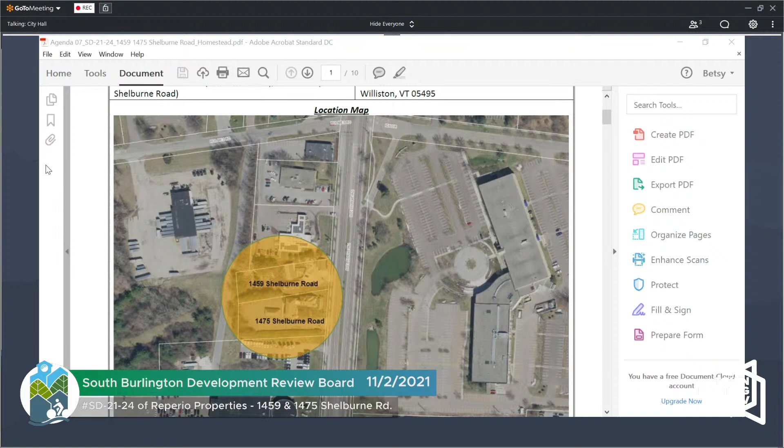Marla, I don't know if you want to scroll to a more detailed plan. I think that's a nice overview. Thank you. Any questions from the board before we start to move through the staff report?

Okay. The first comment is on page, there's no page numbers. I think it's page 3.

Thank you, Dan. Staff recommends the board provide feedback on whether they consider the proposed architecture to have created an attractive transition to the existing building.

I'd ask board members what they think, and I'm especially interested in Mark's thoughts, being that he's an architect. So, they have some renderings in front of us, and I'm wondering what the thoughts are.

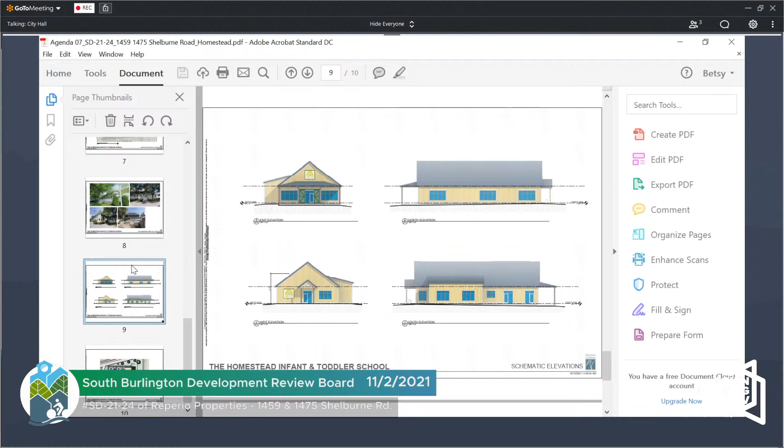Well, I don't think it's an unattractive building. I think it's actually an attractive building. I'm just questioning, I read the narrative, and it's supposed to be like a carriage house accessory to the main building, which is more like a Victorian style. I'm just questioning whether it's the appropriate style of house for Shelburne Road.

Right next to the Blissby building, Palace 9 development right on the corner. If this was out in the southeast quadrant, I would say it's a great building to go in that type of location, more rural. Shelburne Road to me feels more commercial, and it's like you're saying, it's an accessory structure to a building, but I think it needs more of a quasi-commercial feel, more complementary to the building currently there than an accessory building.

Right. And at this point, we haven't really looked a lot at materials, and I think we could definitely express a more contemporary aesthetic when we get into the materials a little further along. Originally, the concept was kind of more of a barn carriage house structure. I totally get it, and I see that, and that's successful.

I just think that for a campus feel on Shelburne Road, they need to be a little more complementary to each other than a contrasting accessory type feel. Yep, and I appreciate that too, because we don't want to just complement that building. We do want to complement the other context around.

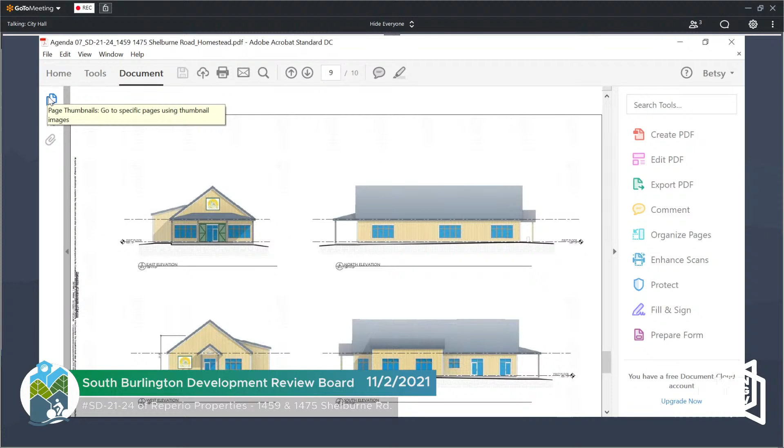Yeah, go ahead, Dan. Quick question: do our LDRs require consistency with abutting properties? Is there a required design aesthetic within this district, or no?

There is, this is a standard site plan review standard, are transitions between structure and site. The urban design overlay has sort of a form-based code light feel to it, where there's certain glazing requirements. The entrance has to face the street, and there has to be a walkway towards the street. So there's some varying degrees of specificity here.

I'm talking about more the relationship, does it need to be consistent with Shelburne Road specifically, as opposed to having the right to create a building that has some identity with the existing building, trying to create a campus feel. To some extent, looking at this as a childcare facility, I look at it and I kind of like something a little more attractive, Victorian in feel.

It may seem out of place with all the square things with metal facades being built these days, but I get that. At the same time, unless we're clearly saying no to everything, let me read the specific standard. There's a couple of standards, there's a generic one and a slightly more specific one.

I think this is the most specific: proposed structures shall be related harmoniously to themselves, the terrain, and to existing buildings and roads in the vicinity that have a visual relationship to the proposed structures. So it's pretty squishy, but it's also specific that it relate not only to its own campus, but to the neighborhood. So I have a question then.

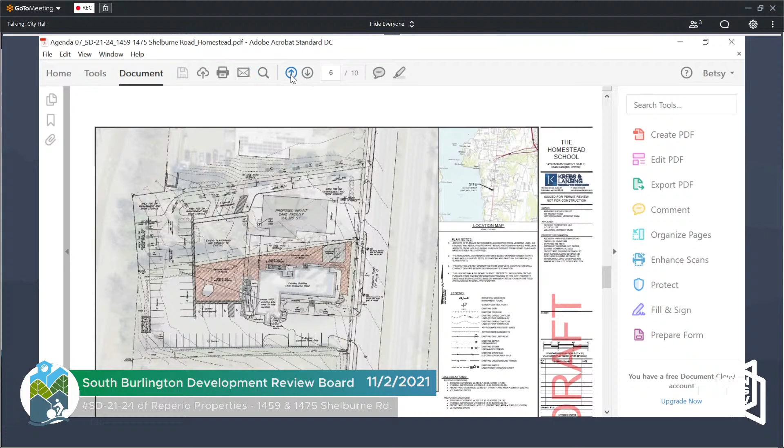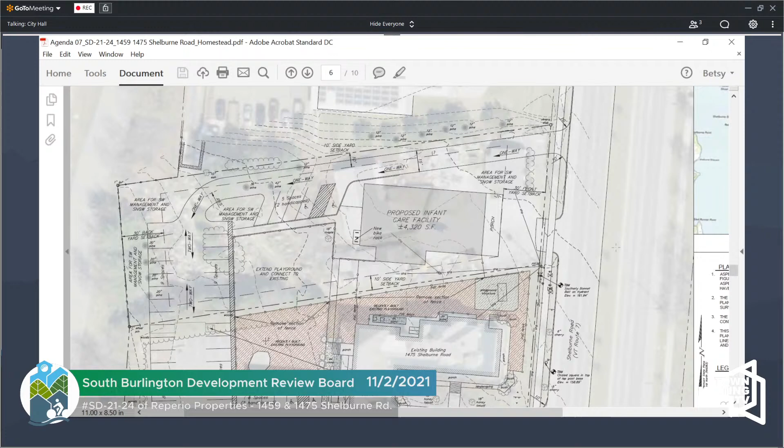Right now there are kind of islands separating the 5 spaces out front, there'll be a green area there. There's also kind of corner green areas all around, but we'd be willing to maybe do 2 or 4 in that big parking lot in the back, which might make more sense than trying to spread them out even further. Because even on the existing parking lot, there's already a grassed island that kind of exists on the southern side of the parking.

So again, trying to maintain as much parking as possible, but we understand we'll work with the town in order to get those. Can I make a comment? Sure. Just as you're looking at this, if you start including the area between those 5 spaces to the north where you have stormwater as your interior parking, then that parking area becomes part of your calculation as well. So if you increase your numerator, you also may be increasing your denominator.

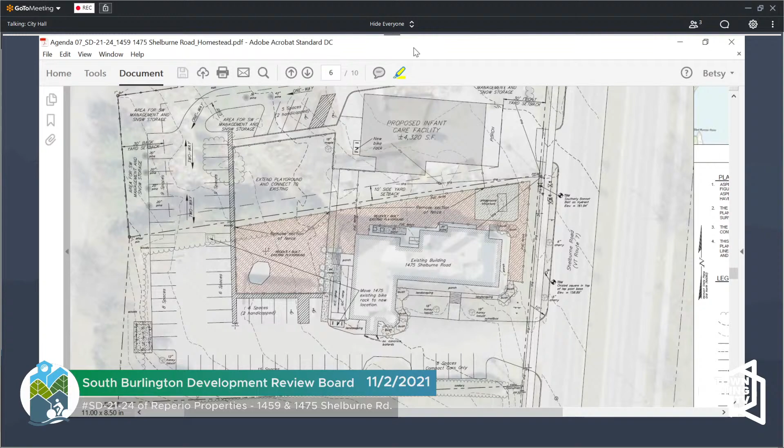And I would think that safety in parking lots with little ones running all over the place is of paramount importance.

I'm curious, since these are 2 separate sites and we weren't planning on doing any work to the parking lot to the south, do we have to bring up that standard to the south at this point, or are we just looking at our 23 spaces? I understand we're not planning on doing any work to the parking lot to the south.

So with that being a separate property, I'm curious how much we have to bring that up to compliance when we're not proposing any work there except expanding the parking lot. On the north side of the site, we've got 23 spots at the moment, so I'm looking for some direction on that.

Sure, I'll turn to Marla for that. Our interpretation is in the document you read out, comment number 2. If you want to interpret that differently, as I said in the notes, this is not a situation the LDRs really included provision for. On the O'Brien Hillside Phase 2, for instance, we have parking lots that cross lot lines, and they're considered, for landscape standards, one parking lot. We applied the standard the same way here, but it's not something explicitly contemplated. Does that help? Yes.

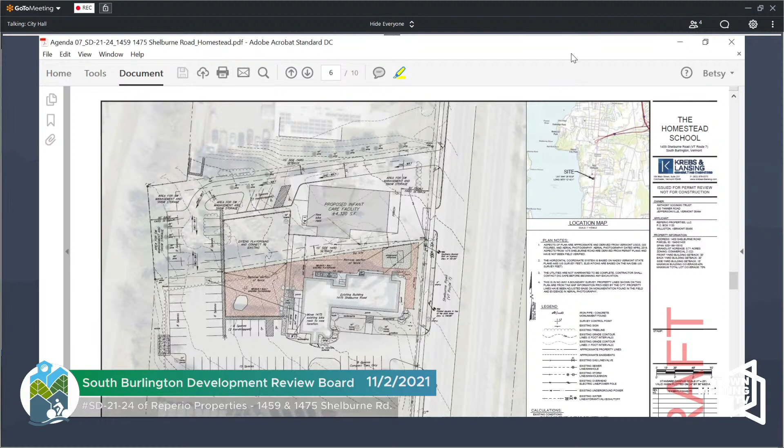We originally had it so wide just from people coming off that road and being able to turn, as well as thinking about fire truck access at the time. We are not opposed to reducing the width in there. I think we might do a hybrid approach where we might even try to steal a few more parallel parking spaces close to the northern property line, and then reduce it in areas where parking really wouldn't be appealing, as you go out towards Route 7. Maybe make up some of the parking spaces we reduce with parking islands.

Okay, thank you. Any comments or questions from the board? No. The last question relates to whether or not you're relocating the existing dumpster.

We plan to leave the existing dumpster where it is and have that be used for both buildings. When we first did some of the work on the existing property, we discussed with Marla that we'd like to maintain the parking in front of it. That's used for drop off during heavy flows, and that's not the time the trash company is going to come pick up trash. The people who work at the facility would just know not to park there, so the trash truck can easily come, get the trash, and leave. Those spaces could be utilized for parking during rush hours.

We definitely could put signage saying restricted use between certain hours, but I think it's also pretty easy for the applicant to work with their employees to determine that. Okay, thank you. Any questions from the board? Marla, do you have any questions? Nope. Okay.

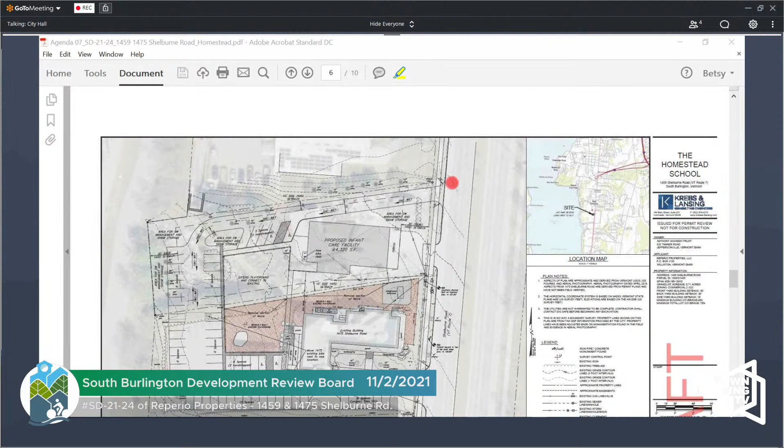But didn't they just say that they were exploring with another property owner getting some kind of access to Holmes Road? Oh, I see what you're saying, direct access. I'm sure that's what I heard them say. From Holmes Road, I think. Okay, for the staff comment. Sorry, I had a little bit of a computer glitch, so I got a little lost.

Okay, let's go, that's the other, four. Oops. It's not behaving. Ask the applicant to describe why they are not pursuing this access and provide feedback on whether they should do so. And that is, the applicant was interested in accessing the property via Holmes Road. Did we skip that one? No, we talked about that. I must have been in the midst of computer glitch. All right, well, they brought it up tonight.

The only way that I could see that they would access Holmes Road, in working with another property owner, would be the access road that goes to the Goss vehicle dealership. If they do that, the end of that road is on Holmes Road, which is directly across from the South Burlington Fire Department. So if you do that, you're going to have the intersection at Shelburne Road and then another access way on Holmes Road. I don't know what the impact would be with the South Burlington Fire Department and that traffic, because there's another road that goes behind the Audi car dealership, along the side of the fire department. So I would just bring that to your attention that with parents sometimes running late and wanting to get their kids to daycare, I think there is potential for some additional traffic flow consideration there. So that's just one thing.

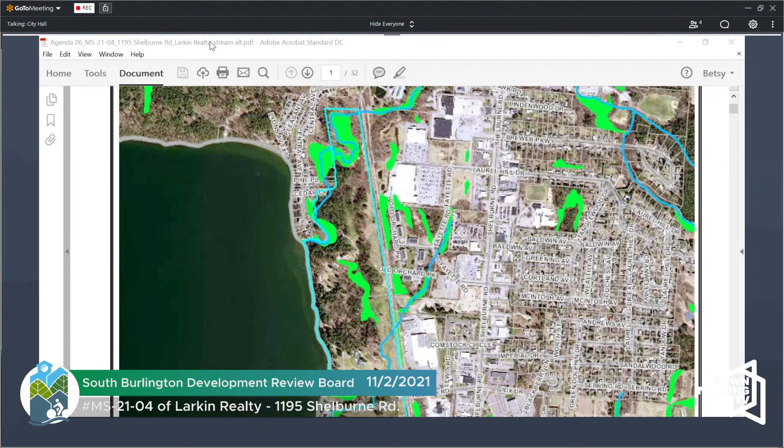Looking back at the ortho photos, it was between 2006 and 2010 that the initial culvert undermining and loss of the head wall was experienced, and it's just continued to eat uphill since then. So the photos represent the existing conditions that were part of the package, and we're just looking to find a way to stabilize this in a way that doesn't create the same problems downstream that exist today.

I think, before we discuss next steps, we should hear from Marla, because you had a memo that was inadvertently left out of the packet. Yeah, and I think it echoes some of Dave's sentiments, that we should make some big picture decisions before we go into the nitty-gritty details.

Why don't you share it, and then I can read it into the record, if that's all right. Sorry, my computer just locked me out, it says this account is locked, so I don't know if I've been hacked or what happened. It's terrible. Hold on, I forgot how to do this. Oh, here we go. Forgive me.

So, first paragraph is just a description. This is the project. We have not yet reviewed it.

The most important decision for the board is to determine whether the stream buffer encroachment is allowed. The LDR allows stream buffer encroachment under a very limited set of circumstances as defined in 12.01C4, new uses and encroachments within stream buffers.

12.01C2 states the following: It is the objective of these standards to promote the establishment of heavily vegetated areas of native vegetation and trees in order to reduce the impact of stormwater runoff, reduce sedimentation, and increase infiltration and base flows in the city's streams and Lake Champlain.

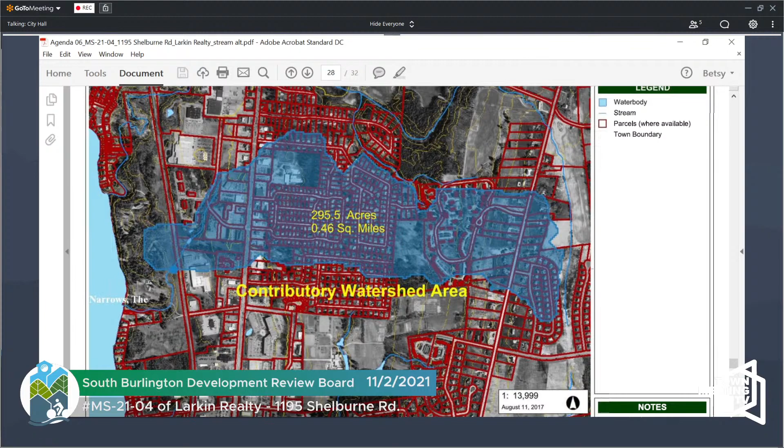I'm wondering, back to the language we've got there - so the permitted use is what, residential in this area? That's correct. And when you have a typical stormwater treatment project that might have an outfall 20 feet from where the water's flowing, and we try to permit those things, and there's work being done in the stream bed, we allow that under what?

So for the purpose, there is an exception in the LDR for the purposes of stormwater treatment, and that's a little bit after the one that Betsy had shown. We included that for context because this isn't a stormwater treatment project - because it's a stream, it's not a stormwater practice. But it's collecting stormwater. Right, so my interpretation was that that wasn't an applicable exemption, but it's something we could certainly explore more in this or other meetings.

Can you display that language on the screen? Go ahead, a little up more. No, I think that's done. Keep going. There, F - you want to display that one? So F is one of the allowable exemptions.

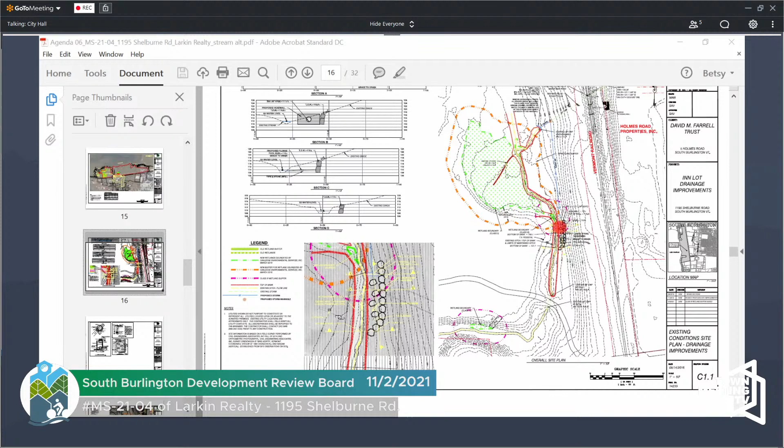And then another 36, Dave? From the red dot directly down to, keep going, keep going, there you go, right there, not quite that far, but almost to there. Would that be a culvert, a new stream segment that's underground? That's correct, our peak flow diversion culvert.

Can I ask what he uses that section of lawn for? What does he use this little section of lawn for? Personal enjoyment, yeah, lawn stuff. Okay, so when he's done, it's just the section from the head wall back that's being restored to lawn, not below the head wall? Yeah, we need to maintain the stream where the minimum stream flow pipe discharges to. That's correct. Right, I thought you were filling in the whole lawn, got it, okay.

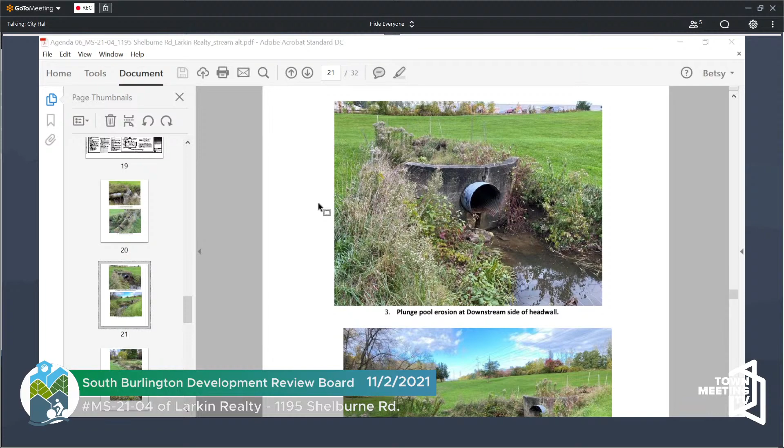I got a question on this standard, and this is why the legal thing would be good, it's back to this section 4.12 point something 4. The use is not just the house itself, it's the property itself, right? It would be residential use, right? You're walking across your lawn and all that, cross-country skiing or something, or walking your dog.

If there's only 10 feet of crumbling, buried culvert, that's not a crisis, but if it was 11 feet this would get triggered? We do not have that standard. It's kind of one of those things, in light of what's being proposed, it's the enjoyment of one's property. If you had an erosion problem because of a buried stream, this is a pre-existing, pre-existing nonconforming structure. If there was a stream there now, we would never allow them to underground it like this anyway. So it's restoring it to its prior condition, in a way, allowing an existing nonconformity to be rebuilt.

Well, is somebody allowed to repair an existing nonconformity? That is one, so repair of something is one of the other sections of 12.04C. So we should read exactly the words of that. My understanding historically in all municipalities is that you are, but you can't make it more non-compliant.

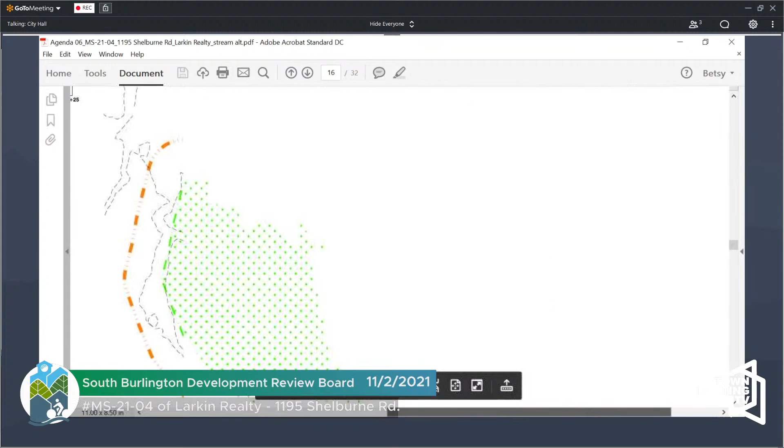So Betsy, very good. To continue the thought, if you remember in the photos, we showed a bend in the stream as we're looking in the southerly direction. So that's right there. And then as you move past that and get into that straight section, what you see on this particular plan are a number of circular-ish black features. Those are some of those boulders that are intended to create both a shoulder, I'll call it a shoulder, for the ability for water to drop from that particular plateau into the adjacent stream. So that's again some of the features, supported with the cross sections off to the left of that particular drawing. So that's kind of it in a nutshell, without getting into a lot deeper, no pun intended, discussion.

Okay, board thoughts. So I guess one question I have is, how is putting a 36-inch HDPE diverter and running it all the way downstream and then dumping it out into some boulders and then into the natural flow different than just putting some boulders below the plunge pool, the existing headwall, rebuilding it, and having that occur further upstream? This work is occurring outside of the natural stream channel. So that's really the biggest difference.

Okay, so we're basically taking advantage of the topography to take the concentrated flow, reduce the energy, and then let it fall into the natural stream channel. So all of this is focused on how do we stay out of the stream channel. Like I said, one of the things we would have done 40 years ago was go right into that stream channel and do a Corps of Engineers job of armoring all of those edges. We'd pat ourselves on the back and say, yep, we stabilized that stream, but it would be an urban environment, not a naturalized area. So what we're trying to do is allow Mother Nature to recover by eliminating this constant beating over the head from these large storm events. So that's really the mantra of what we're trying to do here.